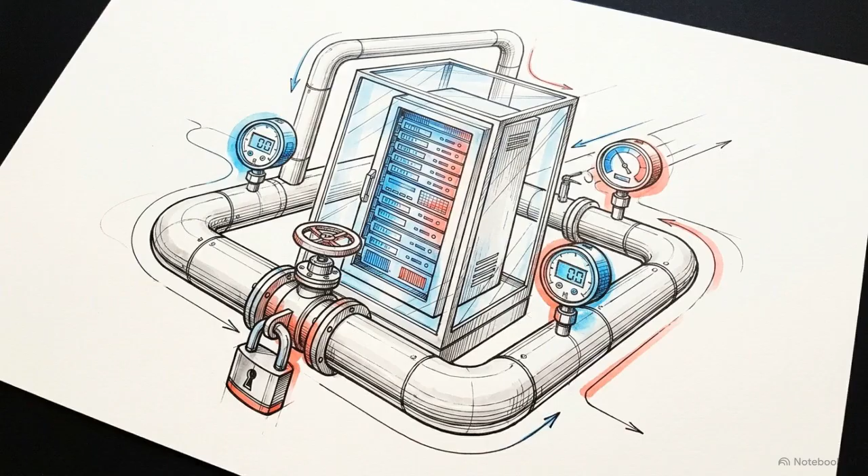In a commercial IT environment, the fire suppression system can be as destructive to your hardware as the heat and smoke it is fighting. Facility managers face a difficult choice. Standard systems save the physical building while soaking servers, while specialized alternatives protect the data but carry immense installation and maintenance costs. We can map these options on a quadrant chart, comparing the total cost and complexity of the system against the level of protection it provides to your internal assets.

Wet pipe sprinklers sit at the bottom left. They are the most affordable to install, but provide the lowest level of hardware safety. On the other end, clean gas agents occupy the top right. These systems offer maximum protection at a significant price premium.

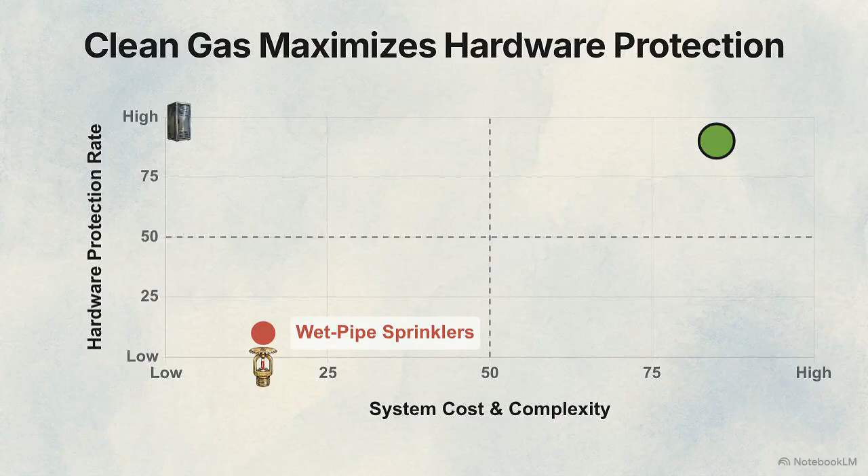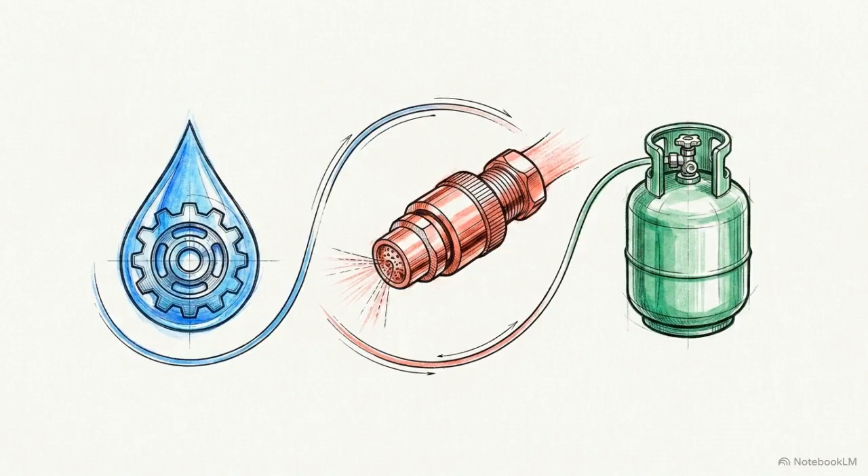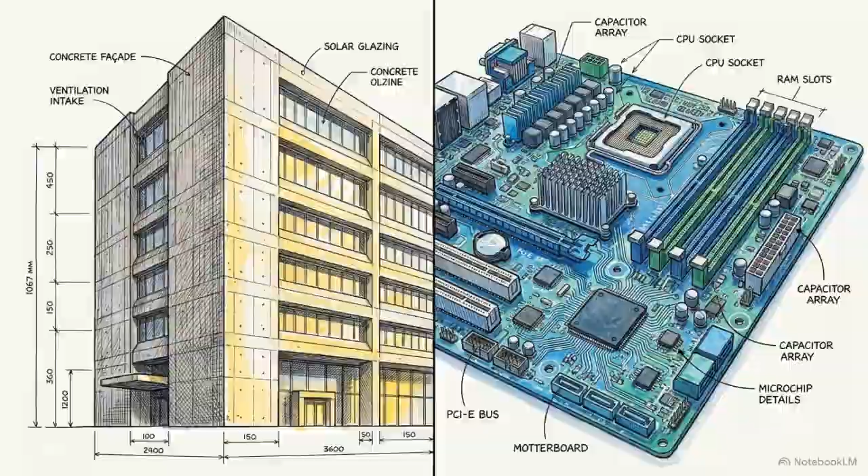To find the right balance for your facility, we need to analyze the three primary technologies: pre-action sprinklers, water mist, and gas-based clean agents like FM200 and Novec 1230. Ultimately, your choice of suppression system reflects whether your priority is the survival of the physical structure or the data processing equipment inside it. A standard IT closet provides a good baseline for evaluating budget-conscious, water-based systems.

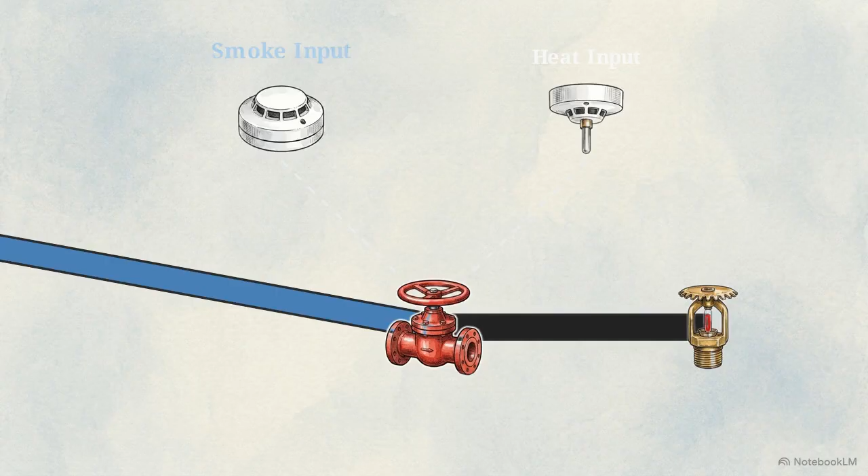Pre-action sprinklers utilize a dual interlock mechanism. As this schematic shows, the central water valve only opens if it receives two distinct signals, typically one from a smoke detector and one from a heat sensor. If a single sensor is triggered by mistake, the pipes stay dry.

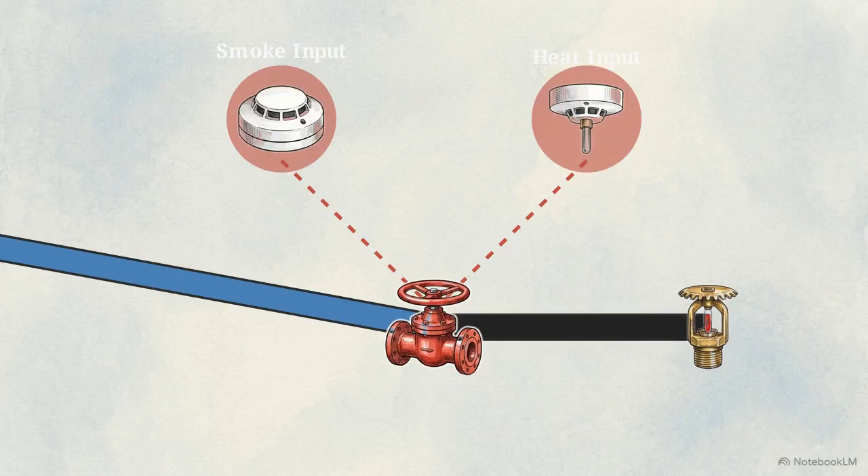The system only releases water when both sensors confirm a fire, which prevents accidental discharges caused by mechanical damage to a sprinkler head. This is a cost-effective way to prevent accidents, but the risk remains. If a real fire triggers both interlocks, the resulting water flow will likely destroy all unsealed IT hardware.

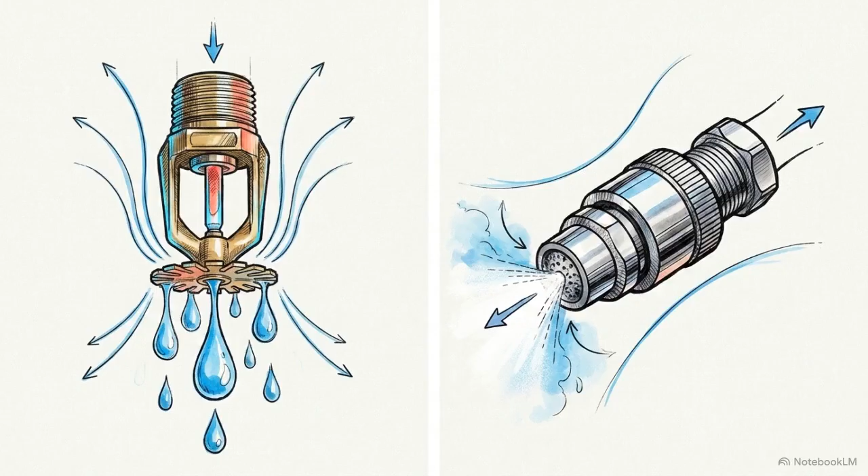Water mist systems offer an engineered alternative that attempts to bridge the gap between cost and protection. Using high-pressure nozzles, these systems atomize water into microdroplets. This creates a dense mist that suppresses fire quickly, while using only a fraction of the water volume found in traditional sprinklers. However, the savings in water volume are offset by the cost of the infrastructure.

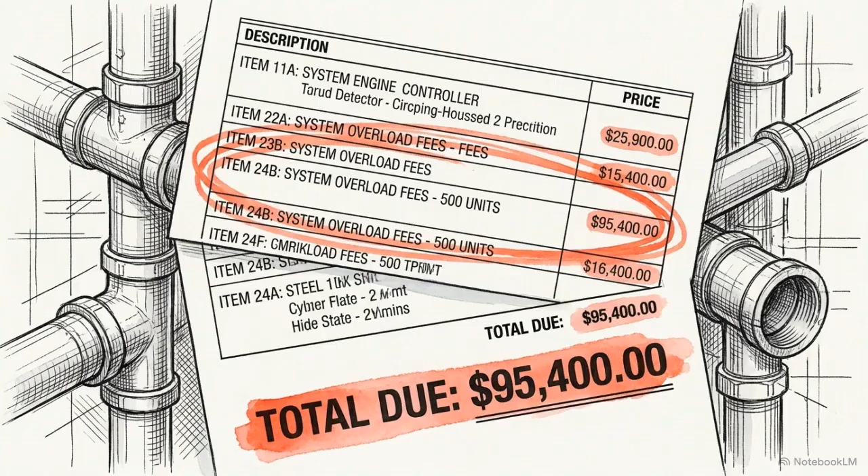These systems require specialized, high-pressure plumbing that is expensive to install. There is also the moisture factor. Even in a micro-droplet form, the resulting humidity carries a moderate risk of causing electrical shorts in sensitive electronics.

Water-based systems protect the building's integrity and satisfy insurance requirements, but they always carry a degree of risk for the hardware. In mission-critical data centers, even a moderate risk to hardware is unacceptable. These environments require a different approach.

The modern alternative is Novec 1230. It uses a fluoroketone, a liquid that vaporizes into gas upon discharge. It provides the same hardware-safe suppression as FM200, but has a global warming potential of 1, making it fully compliant with current environmental standards. The trade-off is the price. Novec 1230 is significantly more expensive to install and recharge than previous generations of chemicals.

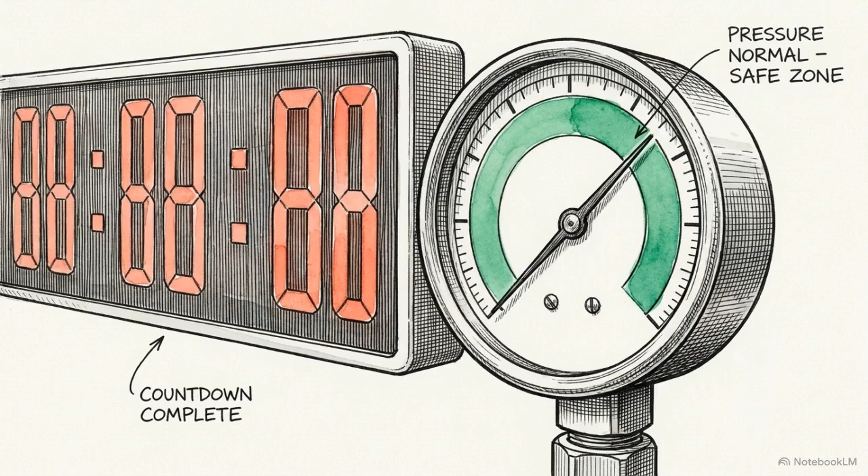Regardless of the chemical you choose, all gas systems share a single critical vulnerability: the room itself. These agents only work if the room can maintain the required concentration for at least 10 minutes. If the gas leaks out too quickly, the fire can reignite. This is why facilities must pass an annual door fan test. By measuring air pressure differentials, technicians can find microscopic leaks in the walls that would cause the system to fail.

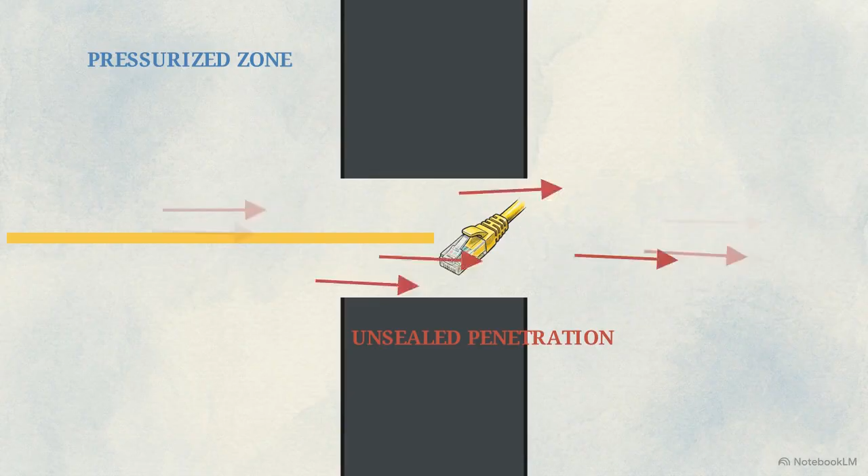If a contractor drills a single, unsealed hole for a new cable, the room loses its integrity. The entire suppression system becomes non-compliant. Investing in gas suppression requires a permanent architectural commitment. The effectiveness of the system depends entirely on the airtight seal of the room it protects.

To determine which path is right for your facility, we can follow this decision matrix based on your specific risk tolerance and budget. The first question is whether your business can survive a total hardware loss, provided your data is backed up off-site. If the hardware is expendable, pre-action sprinklers are the logical choice. They satisfy safety codes and protect the building without the extreme costs associated with gas.

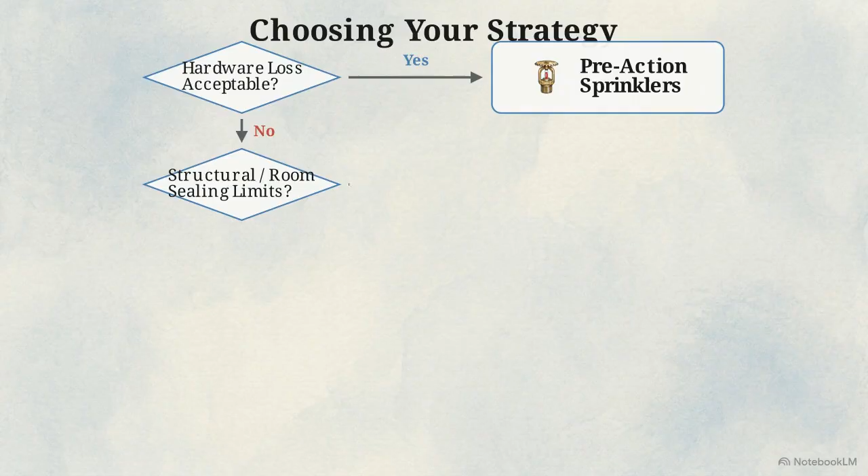If you cannot afford hardware downtime, we move to the next node. Are you restricted by a building that cannot be perfectly sealed, or by a limited budget for high-pressure systems? If the room cannot pass a door fan test, water mist is the most viable compromise. It offers better hardware protection than a sprinkler, while working in a standard room environment.

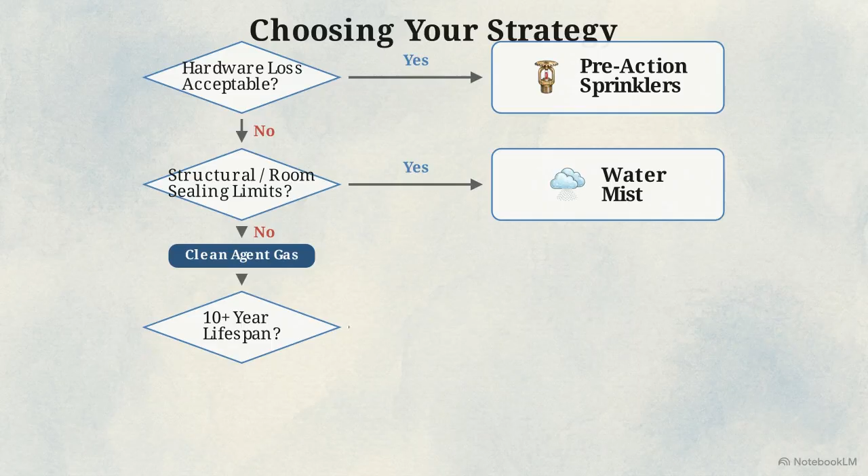If your facility is mission-critical and can be hermetically sealed, gas-based suppression is the necessary investment. Finally, consider the expected lifespan of your infrastructure. If you are building for the long term, choose Novec 1230. Avoiding legacy agents like FM200 ensures your facility remains compliant with environmental laws for the next decade.

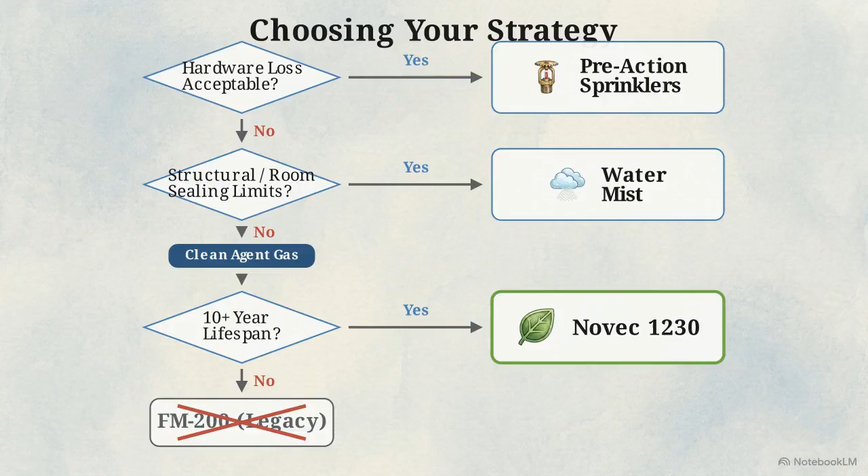These technical choices reflect a broader strategy for disaster recovery. Your suppression system determines how long your business stays offline after an incident. Align your infrastructure with the downtime you can actually survive.